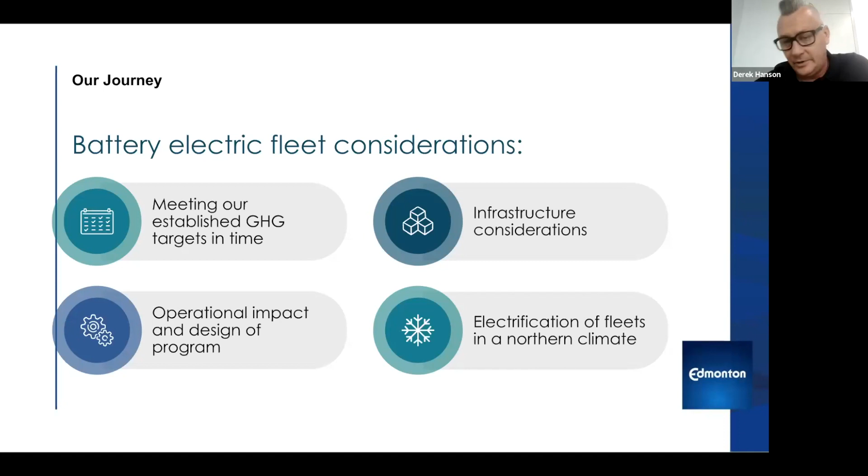What are the operational impacts? What does it mean to operate these vehicles in a cold climate? And finally, what does electrification mean in the northern climate when we get temperatures downwards of minus 20 degrees? Next slide. So our fleet electrification journey started with battery electric buses.

And just so that everybody knows, we park all of the buses indoors, so we don't have the challenges of having a mix of fleets indoor and outdoor. So we built a specific program of elements that we believe to be important to our operations, and we wanted to avoid having a fleet within a fleet, giving us that flexibility of our operations and cost control.

We wanted long-range buses. We find range critical to the success of our program. We wanted scheduling flexibility. We felt that time is money, and we wanted really propulsion agnostic operations. So back to the point of not creating a fleet within a fleet, we made a decision to go with fully in-depot charging, so no en route charging. And I believe we were one of the first to do this seamlessly within our garage operations.

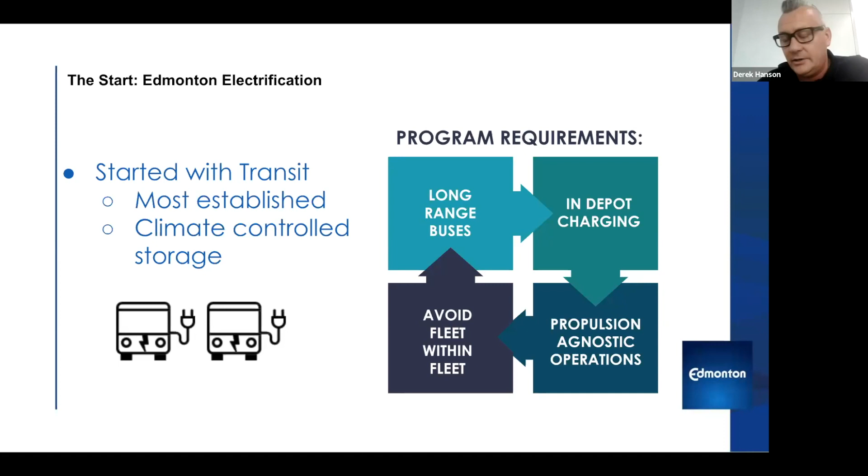And we went with top-down pantograph chargers, which saves us footprint, and we accommodated these into our new garage designs as we had a garage that was in flight being built at that time. Next slide. So what did we learn in evaluating whether we're meeting our GHG targets on time? We're looking at the speed of the transition, the goals set out by our GHG plan and our conversion by 2040. And we asked, would we be able to transition fast enough with 1,000 buses in the fleet?

Taking a look at our infrastructure considerations, there is a significant investment in infrastructure, a large footprint required at the facility level. We had to evaluate our grid capacity as well within the fleet, and we do have restraints out here in Alberta. With a 2 megawatt feed into our main facility here where we have electric buses, we're able to charge around 14 at a time without tripping our breakers. So we have 50 electric buses at one garage and then 10 at another garage.

And then we also were taking a look at what were our intended program outcomes, such as the range of the vehicles, and we were seeing the impacts of cold weather on the range of our battery electric buses, which then pushed us out to our goal of being propulsion agnostic. And we found that having 60 of 1,000 battery electric buses within our fleet to be manageable, but with moving towards a full fleet of electrification, we were looking at having to actually increase the size of our fleet and labor pool to cover the same amount of work, and then what the tax levy implications would be of going in that direction.

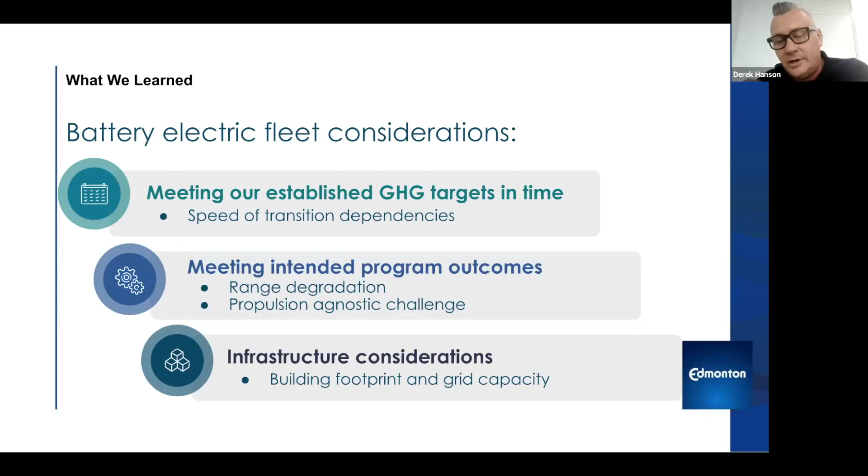Next slide. So why hydrogen and why now? So within the Edmonton region, there's an emerging hydrogen economy. Edmonton is uniquely positioned to be a global distributor of hydrogen. And at the City of Edmonton, we focused on supporting this transition. We are good at emerging markets. Oil and gas has been in Alberta for a long time. Boom is not foreign to Alberta, and we understand how to handle this. And we also have expertise in the hydrogen sector through our petrochemical sector. So we believe we're uniquely positioned as a leader in this space.

So when we looked at our bus, the fuel cell technology has come a long way, and the conversion of our fleet offers us an opportunity for the city to build up the demand of hydrogen and show the world the success of this sector. Again, this is not new technology, and we've had hydrogen available in the Edmonton region for some time now, so we're not reinventing the wheel. And it allows us to meet our program outcomes.

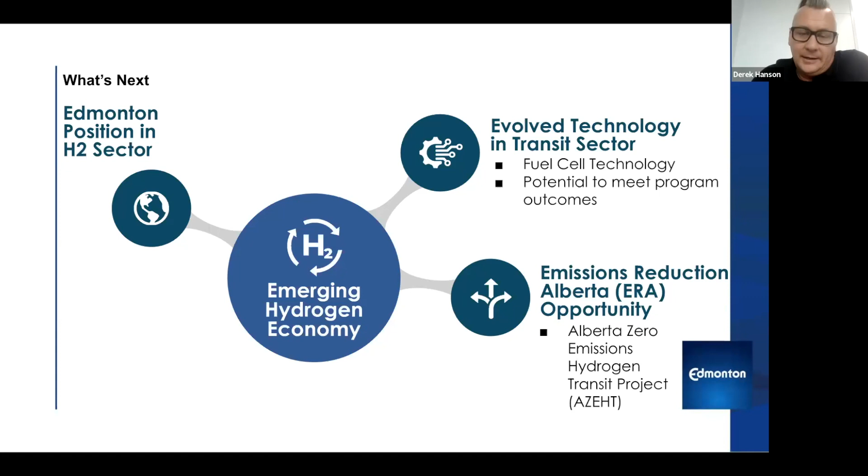So hydrogen technology has the potential to help Edmonton meet its emissions reduction targets. The fuel cell technology can be used in transit, heavy-duty trucking, and other sectors to reduce emissions and improve air quality. And the adoption of hydrogen technology in Edmonton can help to create a more sustainable and livable city and help meet our city's growth objectives of 2 million people. And at the same time, we're looking at how we can meet these objectives. So the Emissions Reduction Alberta opportunity and the Alberta Zero Emission Hydrogen Transit Project then enable us to accelerate these objectives.

Suncor is supplying the fuel, AMTA is providing integration opportunities. The University of Alberta is doing a ton of data collection for us right now. And obviously New Flyer and Ballard for bus deployment and fuel cell. And of course, our transit operators, ETS, Strathcona County, and then Calgary and Banff are also partners on this project, and they'll be piloting our buses during the course of this project.

So it involves a demonstration of 2 hydrogen fuel cell electric buses that will go into service here shortly. We're just waiting for the fueling station to be finally commissioned, but we're getting quite excited about that. And it did involve some facility retrofits at one of our facilities to accommodate the maintenance of hydrogen vehicles.

Next slide. So this is just some background on the bus that we are using for the project. So it's a 40-foot New Flyer Xcelsior with a Ballard fuel cell, range of upwards of 480 kilometers. And we've been doing a lot of testing and independent testing on this bus that's showing us some really great positive results, especially in the winter climate.

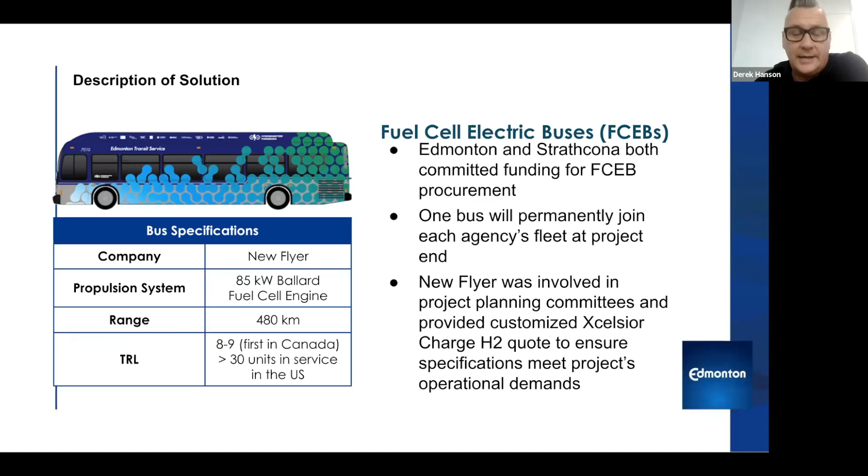So over the last year, our primary focus was on employee safety, training, and infrastructure requirements. And we did have our facility commissioned actually just in the last couple of months, which included our exhaust ductwork, ventilation, and hydrogen gas detection systems with audible alarms, anything that you would need to retrofit a building and accommodate hydrogen. Again, HVAC is a main consideration, being able to circulate the air when required.

Next slide. So this shows some preliminary testing once we've got the bus on the road. In the meantime, until the Suncor fueling station has been commissioned, we've been working with Air Liquide and getting a low pressure fill. And so it's been a great interim step to allow us to do some testing of our buses. And we've been comparing the hydrogen bus to the battery electric bus to a diesel bus, and the temperature for our testing actually went down to close to minus 20 degrees Celsius, and we've loaded our bus with 3,000 pounds of sandbags during this time to emulate passengers on the bus.

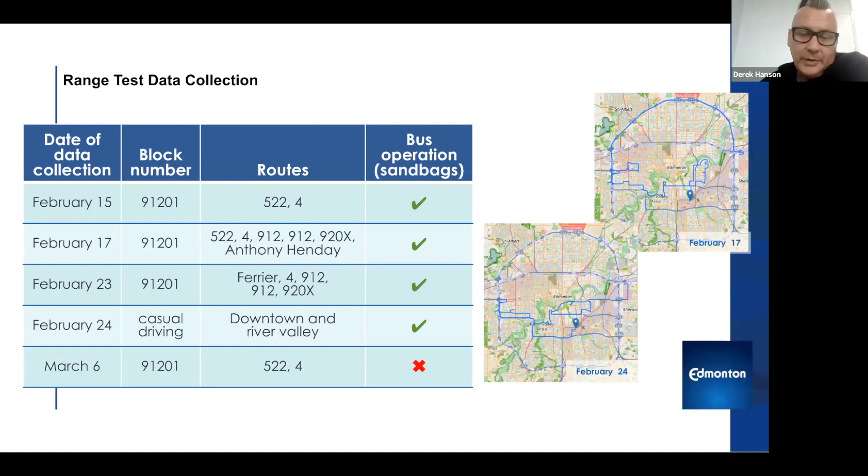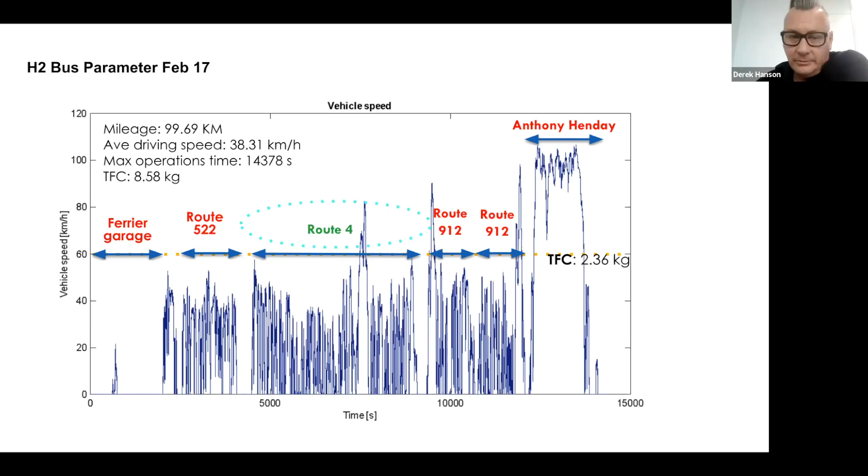Next slide. So this again shows some really promising results for us. So the size of the tanks on the bus to accommodate hydrogen are 37.5 kilograms. So this shows us, when you do the math, that the bus will have a range of, we believe, up to 420 kilometers, which will certainly meet our program objectives and needs. I'll go to next slide.

I'm just mindful of time. I don't want Jess yelling at me later.

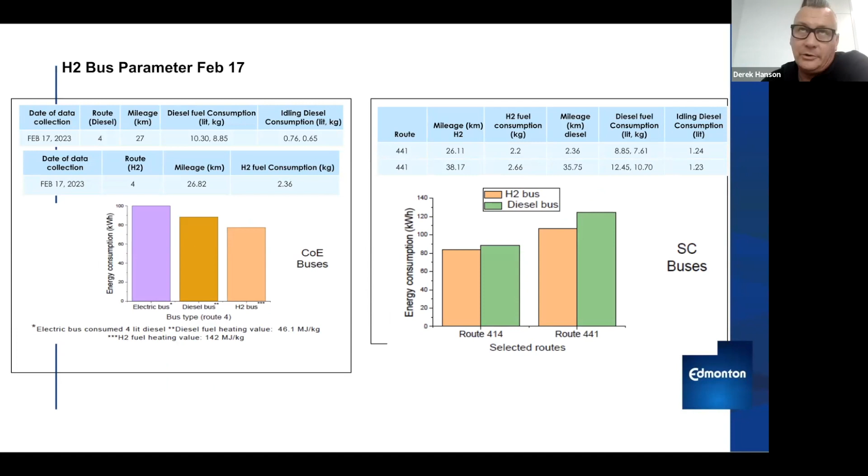Next slide. So where does this leave us now, and how do we transition our fleet? So our ultimate goal down the line will be energizing buildings with hydrogen, but for now, it all starts with a 3-pronged approach, focusing on public transit, which includes the hydrogen fueling station, fleet conversion, and then a future transit garage to be built and operational by 2027.

Next slide. So we find the fueling station to be the cornerstone of our conversion plan. We're looking at volume, which will dictate the transition and speed, public and private access, so fuel not just our buses, but public demand as well, long-haul trucking. We're looking at our southwest location at Centennial Garage as being the primary location with its access to the Henday and long-haul trucking there. There's also the potential for future hydrogen to be pipelined into that facility.

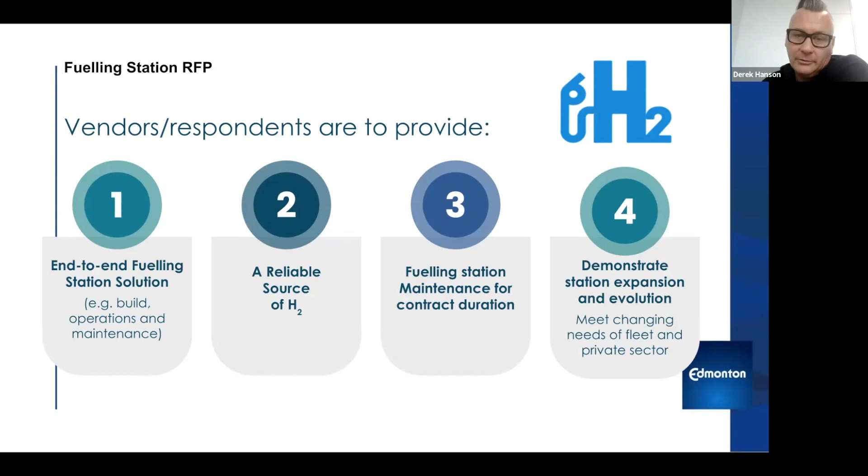And this is just an overview of the vehicles that we will need to convert. So obviously some concern there in terms of the age of our fleet and the number of vehicles that will be at end of life very soon. Next slide just shows an overview of our conversion plan that includes the new facilities and how we intend to have a swing garage to accommodate eventually a fully electric or hydrogen facility or zero emission facility.

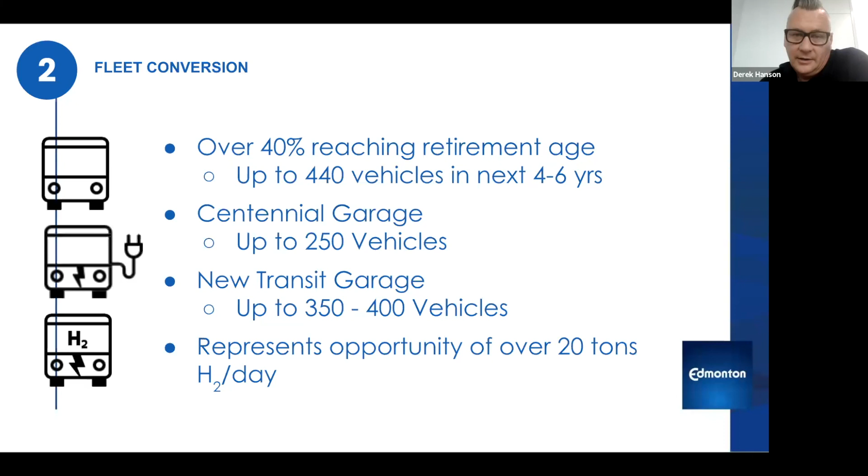Next slide. So we're really looking at a 10-year window to capitalize on the use of hydrogen, being dubbed as the hydrogen gold rush, allowing us to expand our municipal fleet and facilities as well, not just on the transit side. And again, just to reiterate, we see Edmonton as being a world leader in hydrogen producing, and the fueling station as being the catalyst to our transition program.

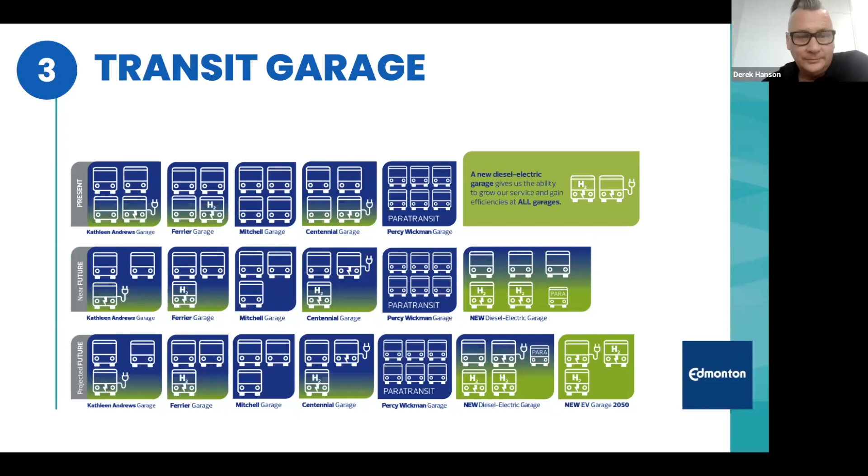Thank you, Jess. So first slide, Erin Cooke, I'm sure most of you know me as chair of the committee here. Just wanted to give an update today on the status of our fuel cell bus program. Next slide. So what we are buying: we took a pretty broad scope to our procurement. The contract that we have with New Flyer to purchase up to 150 zero emission buses over the next 4 or 5 years gave us flexibility to purchase 40-foot or 60-foot buses in either battery electric or hydrogen propulsion.

Of that, the immediate plans for our first several years of that contract is to target around 25 40-foot buses and 4 60-foot buses. But this is constantly changing; as with most cities in Canada, we are adjusting, trying to get our ridership levels up, and it may mean some changes in what we purchase on an annual basis.

The buses that we'll be getting are New Flyer's latest and greatest generation, which now have a 100 kilowatt fuel cell, same amount of fuel as on the Edmonton buses, but updated propulsion system, updated battery packs, and the new fuel cell. Range is still expected to be around the same, maybe slightly better, in the 300 to 450 kilometers per day. These buses will only have all electric heat, no diesel auxiliary heater on both the 40s and the 60s. So we're curious to see how that's going to work out, particularly with the 60s.

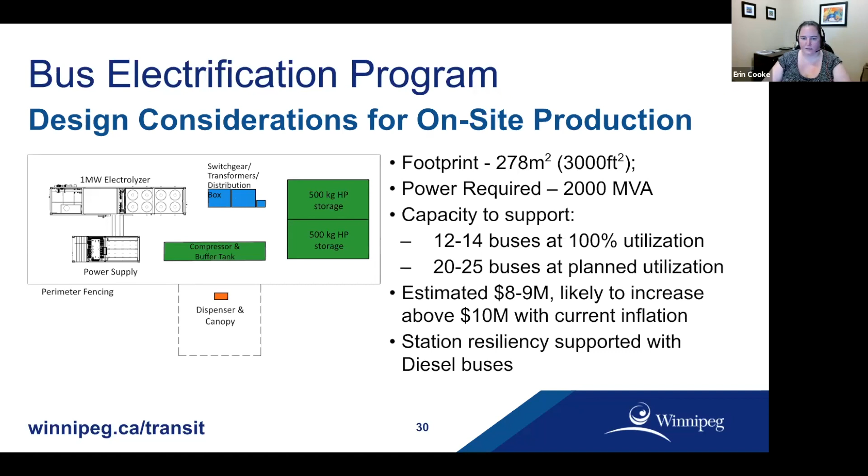This station, even at that price point, was still not designed with a whole lot of resiliency, partially because we didn't have power to support additional production, and we are trying to cut costs as much as we could based on the fact that we're initially proceeding with only 25 to 30 buses, so we'd have a large number of diesel buses to back them up if the station were to go down. Next slide, please. Some other cost considerations.

Our outdoor fueling station will have some cost challenges associated with it. Development of a brownfield site, probably a little bit less than a greenfield site, but still construction is going to be required to dig and trench and pull up and interrupt service, outages and whatnot. The footprint eliminated revenue generating parking. We are forced to pay for parking here, not free parking.

The site is a 0.6 kilometer drive, I think, from our parking garage to where our fueling site is. So there will be some additional time and resource allocation, about 2.5 hours a day, that will have somebody driving a bus and not either fueling or operating. And then there's the fact that we can't combine fueling with other services. Today, we fuel the bus, top up fluids, sweep out the bus all at the same time. But because this is in a remote location, we might not be able to combine all of those activities, and we'll have to double up time. So compromise for a 30 bus project.

On the service and maintenance side, the picture you see here is actually the bay that we've selected to upgrade for our hydrogen service. So this is a 60-foot bus bay that can fit two 40-foots as well. This will be upgraded with hydrogen gas detection. We'll probably need some HVAC upgrades to increase air exchanges, ensuring that there's no open flames and no heat sources within 18 inches of the ceiling. We also have to replace the doors with rapid roll-up doors.

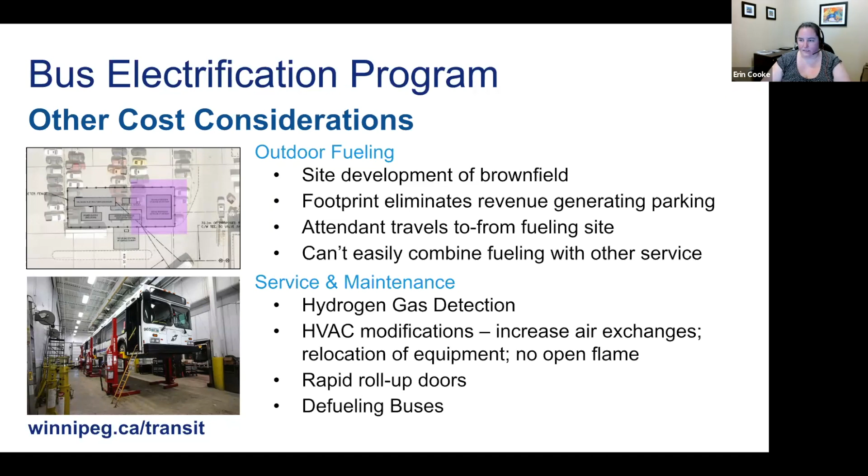And then any service that takes place outside of this will still result in having to defuel the buses. So we have one room that has a dyno that still had some cutting and torching. So that would be a no-no for hydrogen bus service maintenance. So you may have some cost of just venting hydrogen to atmosphere. Next slide, please. So cost considerations, this is kind of an overview of Manitoba.

We have a very low cost of electricity, standardized flat demand charges, which does make our cost to produce relatively low. So just some estimates of what costing will be here. It's around $3.15 to produce the hydrogen. With it being on site, there's no delivery costs. And whether we are operating it ourselves or paying someone to operate it will vary by a couple $100,000 per year.

Clean fuel credit, hopefully coming soon, announced, but not a lot of details on it, but expect it to be somewhere in the $3 range, which could bring our costs down to incredibly low values when you're not considering CapEx built in. Some of the other costs we had quoted to us for similar systems, but not owner operated, or we had contracted for hydrogen as a service, brought the cost up with delivery and other things to $7. And hydrogen as a service to produce fuel on site with all the markups was more like 15. That required additional resiliency built into it, compressors to make sure that you met your service level agreements, etc.

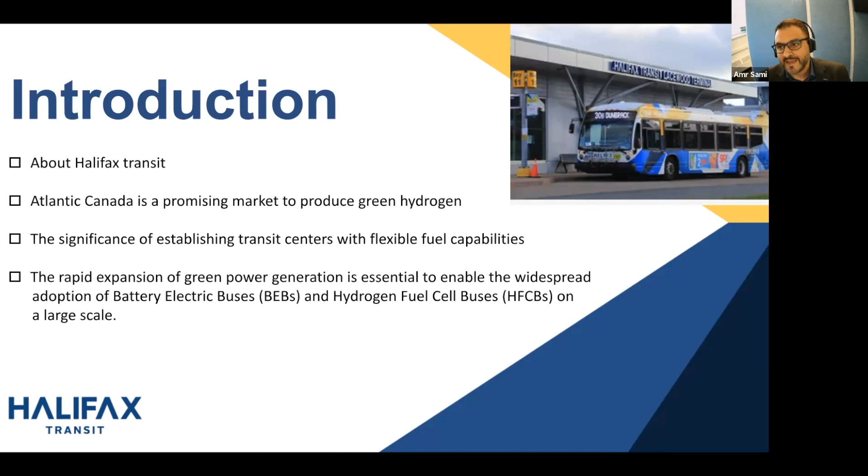There is no doubt the cornerstone of this transition lies in the energy cost and the pressing need for a substantial rise in renewable energy sources. This increase in renewable energy is crucial to drive down the cost of electricity to the level where generating hydrogen or charging battery electric buses becomes economically viable and attainable. Next slide, please.

So hydrogen fuel cell buses present a solution in the pursuit of zero emission transportation. With zero tailpipe emission, they hold great promise for reducing environmental impact. However, we shouldn't ignore the importance of considering the upstream emissions associated with their production and delivery.

One notable advantage of hydrogen fuel cell buses is their extended range, which is comparable to diesel ones. This attribute is crucial for achieving a complete fleet conversion to a zero emission fleet, especially when we consider the harsh weather conditions, long routes, and extended operating hours.

Moreover, hydrogen fuel cell buses require minimal maintenance due to their fewer mechanical components, leading to potential cost savings. Another advantage is their quick refueling time, 10 to 15 minutes, enabling efficient operation and reducing downtime. And overall, hydrogen fuel cell buses offer a viable and practical solution for transitioning to a greener and more sustainable public transportation system. Next slide, please.

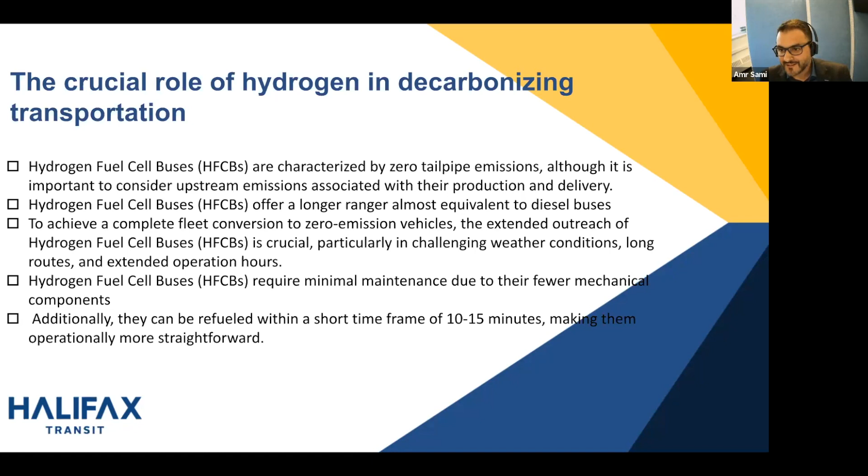So here in Halifax Transit, we closely monitor the shifts in the local market demand for hydrogen. We want to ensure that our perspectives and plans are well communicated with all stakeholders, both locally and across Canada. And there is an important point here. Through our discussion with many OEMs, subject matter experts, and potential hydrogen suppliers, we notice how difficult it is for them to build their business model, as there is a lack of information about what the demand will look like in the midterm or long term. So we are keen to share our views, plans, and expectations. Hopefully it will help even a little to forecast the demand in the future.

And as you may already know, in January 2023, Halifax Transit released a feasibility study on supply, storage, and utilization of hydrogen, along with hydrogen fuel cell buses. As a part of our future plans, we anticipate deploying hydrogen fuel cell buses from our upcoming transit center located in Burnside. Next slide, please.

So once again, the role of energy cost will be crucial in the transition to a green fleet, as it exhibits a negative correlation with the cost of hydrogen production. As the price of electricity decreases, it will not only lower the production cost, but also facilitate the attainment of the desired scale we aim for, because our problem is how we scale the production of green hydrogen. And I believe we all agree that building a business model, whether you are a transit agency, supplier, or OEM, is really hard, especially when the inputs you rely on are not well identified. Specifically for that reason,

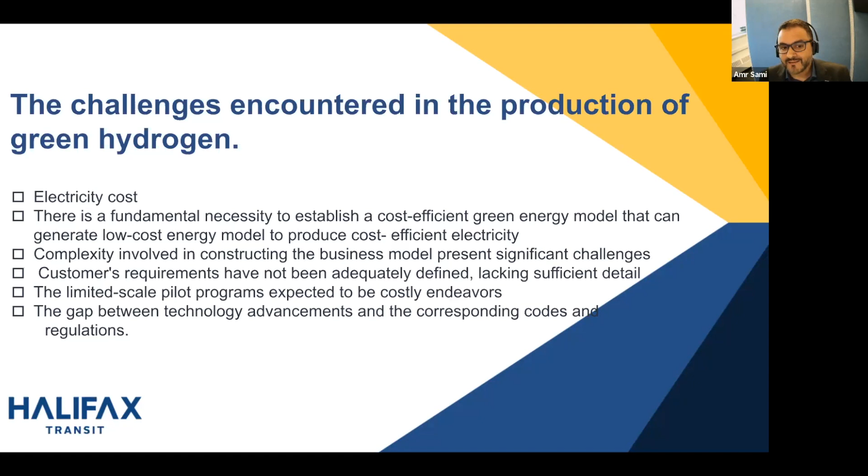Then I will move to the conclusion. I would say in our zero emission journey, we anticipate that hydrogen will play a vital role. The rapid drop in electricity cost will further accelerate the widespread adoption of net zero emission buses, which maybe could be battery electric buses, or maybe in mid-term to long-term hydrogen fuel cell buses. And hopefully with the continuous collaborative approach we have today, transit agencies would be able to find a reliable hydrogen supply next door and seamlessly operate hydrogen fuel cell buses.

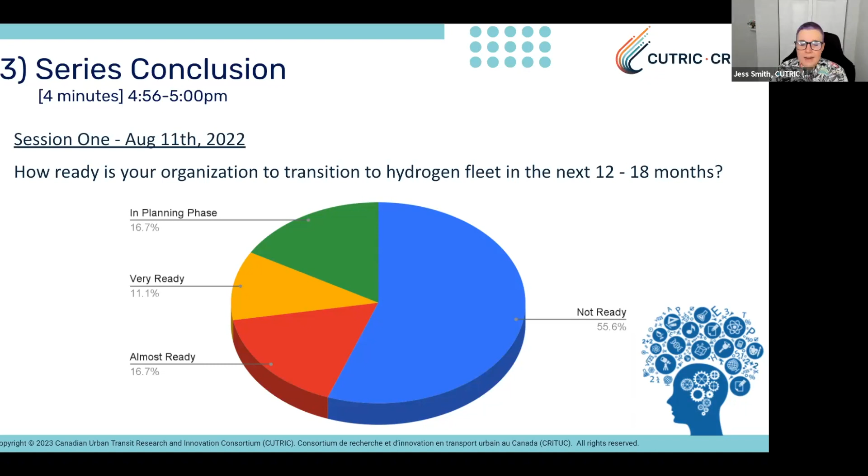At the next session, we talked about whether CUTRIC should proceed with a national FCEB joint procurement for fuel cell electric buses and a green hydrogen supply. The feedback was that a joint procurement would be valuable, supportive, and timing is good, with value in exploring it and strength in numbers. Other comments asked whether it would be a value add or add complexity to an already complex landscape, whether joint procurement with green hydrogen matters, and there's always the question of hydrogen color. Cost and affordability of adopting this technology were also flagged.

In our third session on the 21st, we asked, what is your greatest concern about moving into fuel cell electric bus use? For the majority, it was infrastructure costs, followed by green hydrogen availability. We also asked about staffing capacity, and about 50% of respondents said they had no staff allocated to their hydrogen initiative. We asked which hydrogen color they would support for a joint procurement: 78% said green and 22% said other. No one selected blue.

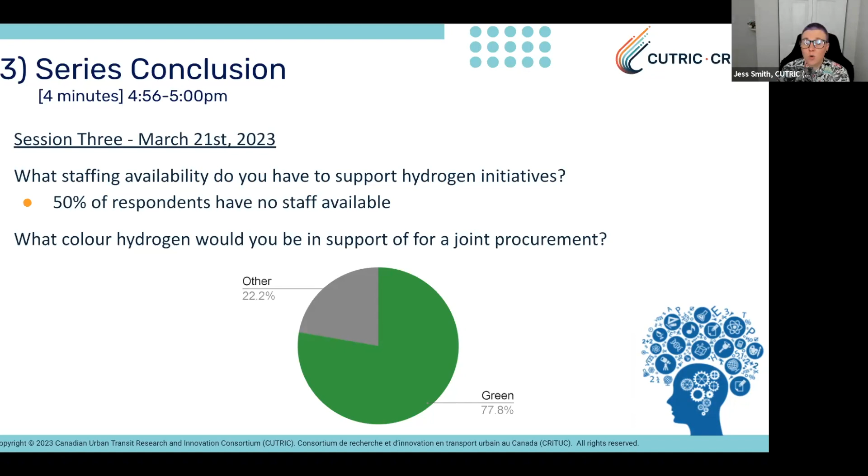We also did a fuel cell electric bus readiness interview, and found agencies ranged all the way from not started to well into planning and even working on procurement. Throughout, we asked how CUTRIC can support. The feedback was that we're good at supporting in a few areas: educating, lobbying and advocating, and doing that fuel cell electric bus joint procurement.

I'll close out today by saying that in the coming months, keep an eye on what we're doing. We're going to provide more detail based on what we've received from this series of open webinars. CUTRIC members will have a heads up on some of the initiatives we're working on. Stay tuned for progress and updates.